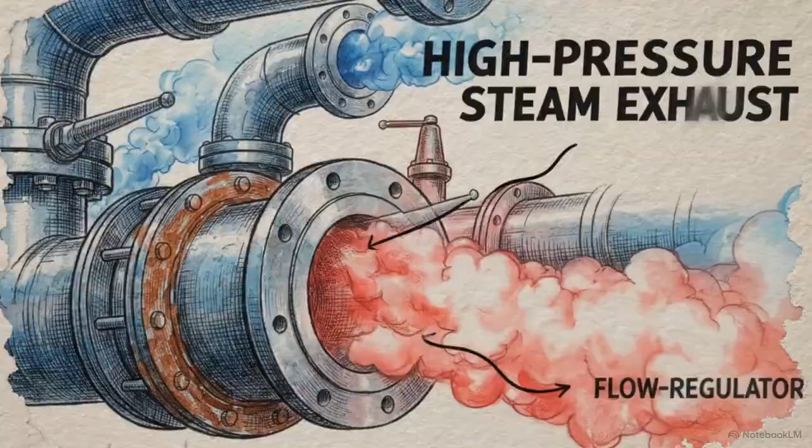In a modern energy facility, scale is absolute. Every turbine, compressor, and pipeline operates under immense pressure, leaving zero margin for error. A microscopic hairline crack or an inaudible vibration in a single pump can cascade through the system in minutes, bringing production to a halt and triggering millions of dollars in losses.

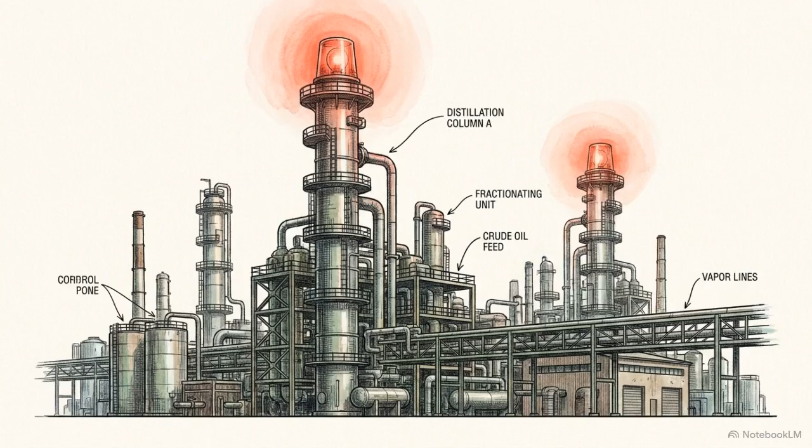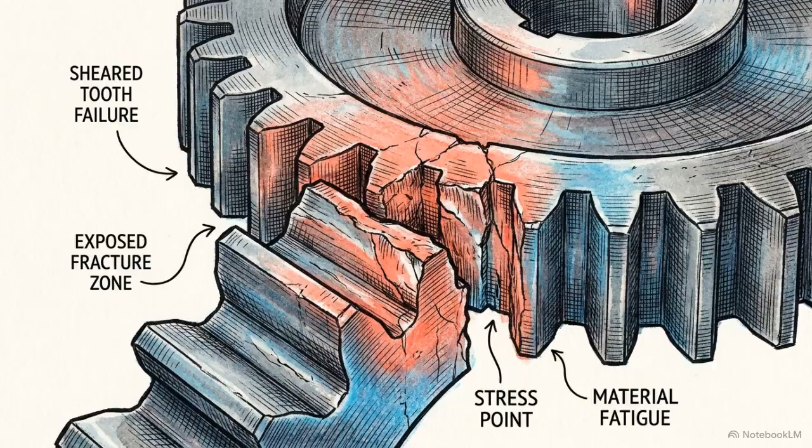For decades, industrial maintenance relied on fixed calendars. Technicians ran routine checks based on standardized schedules, regardless of how the machinery was actually performing. This rigid approach meant facilities often operated in the dark, waiting for a part to visibly fracture or fail before initiating repairs. To secure continuous production, the industry required a method to see those fractures forming in real time.

This logic drives the move toward predictive maintenance. OmniPetro functions as the intelligence network for these facilities. It continuously monitors live operational data to intercept mechanical stress before it manifests into physical damage. Because in the energy sector, reacting to an accident guarantees a loss. True operational safety requires anticipating the breakdown long before the alarm sounds.

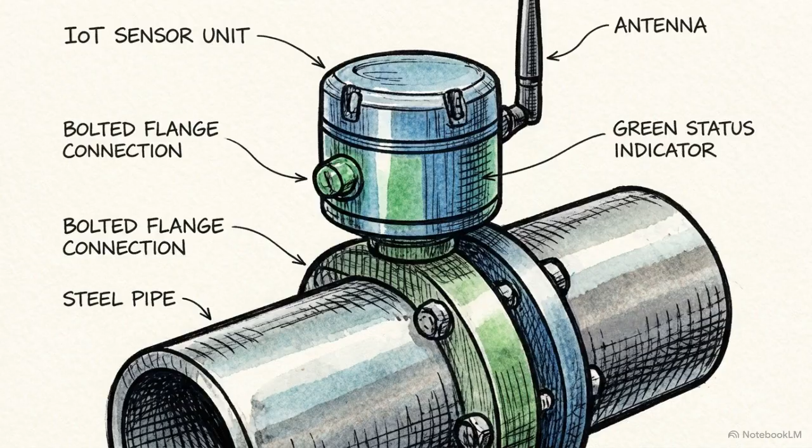To achieve that anticipation, OmniPetro deploys a dense physical layer of sensors. These units constantly measure the vital signs of massive assets, tracking temperature, pressure, and operational load. This data feeds into a system evaluating asset integrity, measuring not just whether a machine is turning, but its long-term structural resilience against compounding stress.

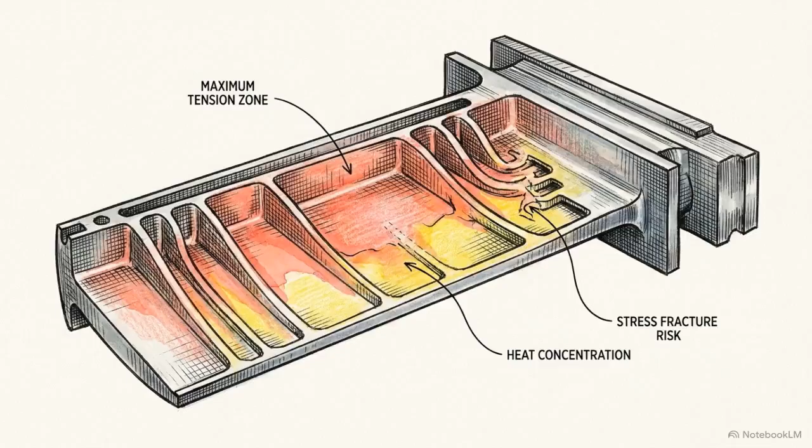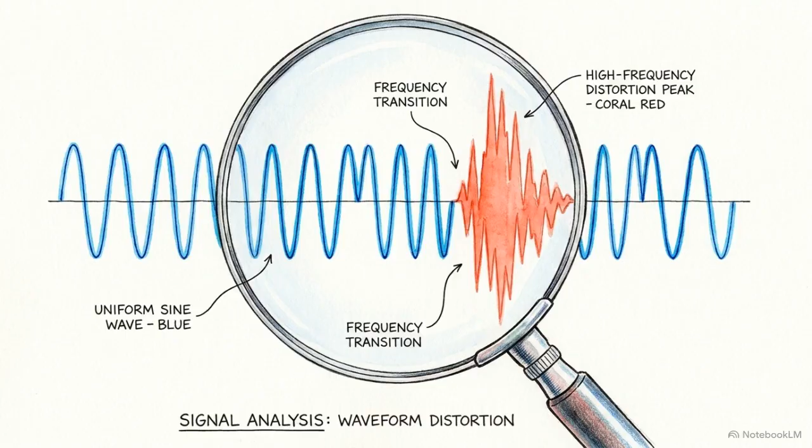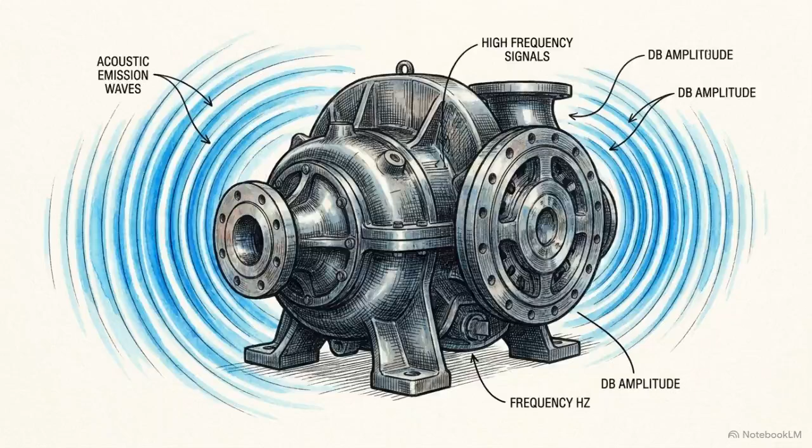This diagram visualizes the earliest warning sign of that stress: vibration. Through precise vibration analysis, the platform captures the exact rhythmic baseline of a machine and scans for the slightest irregularity. A microscopic shift in frequency, entirely undetectable by human hearing, is immediately isolated. The system interprets this tiny acoustic change as the physical precursor to a damaged bearing or imminent mechanical collapse. Industrial hardware broadcasts its eventual failure in these quiet, high-frequency signals. OmniPetro provides the exact analytical sensitivity needed to listen.

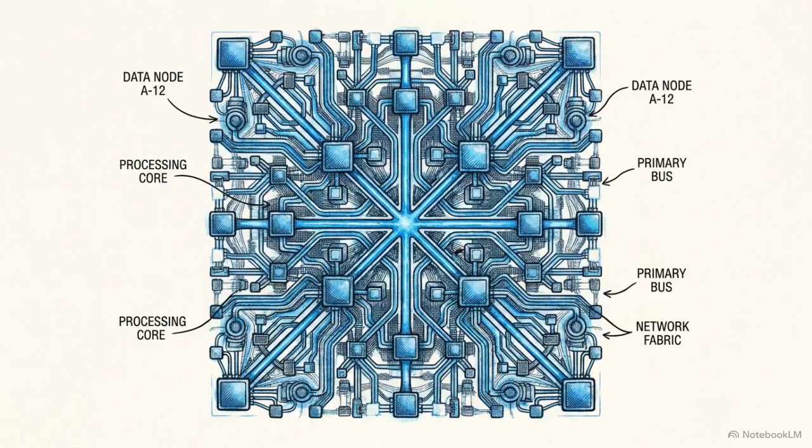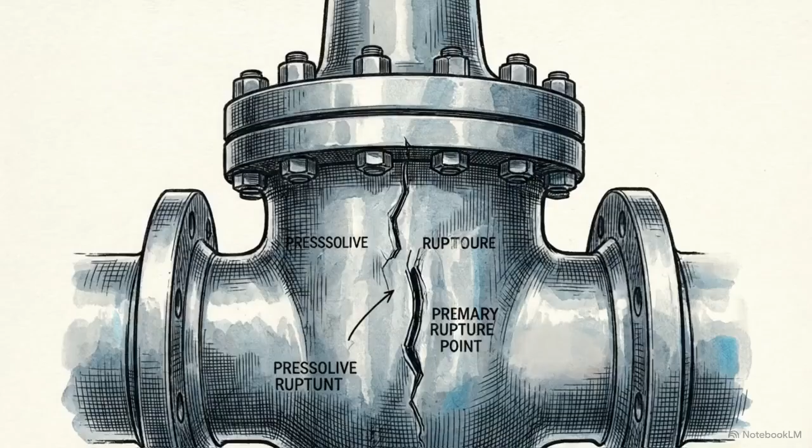Once that anomaly is flagged, the artificial intelligence takes over. It contextualizes the live reading by comparing it against decades of historical records and operational models. The algorithm calculates a highly specific failure prediction, mapping out the exact operational hour the machine will seize and the physical extent of the resulting damage.

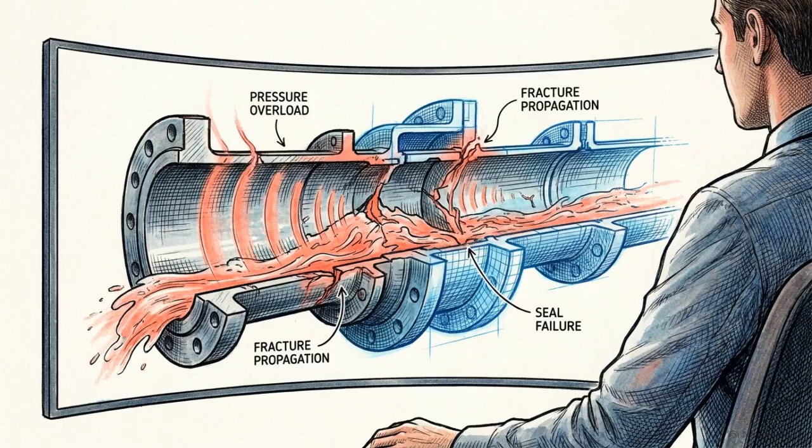This split-screen schematic demonstrates how OmniPetro verifies this safely by constructing a digital twin. This virtual replica mirrors the real-world equipment flawlessly, reflecting its live data stream and current load. Pushing this model forward in time artificially accelerates wear, simulating structural collapse. The facility can effectively experience the entire trajectory of a disaster and map out its consequences entirely within a safe virtual environment.

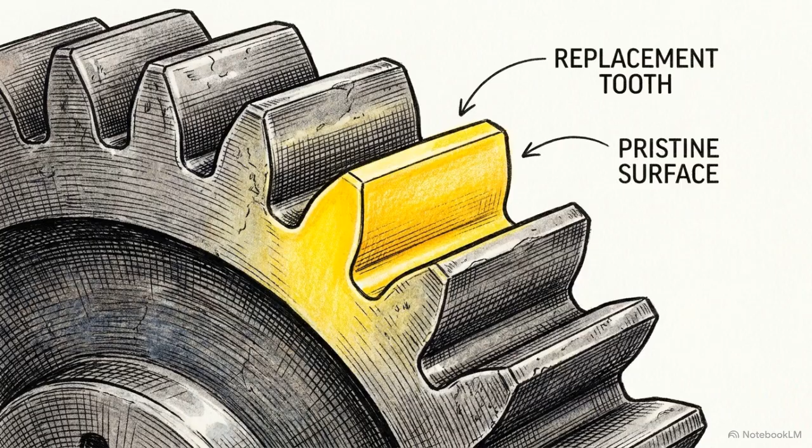Knowing when a machine breaks is just the first step. The system must locate exactly why the stress began. OmniPetro reverses the timeline, tracing the sequence backward to the initial microscopic origin. This diagnostic work addresses the underlying mechanical disease, not just the symptoms. By isolating and neutralizing the exact origin point, the threat is permanently removed, securing the long-term viability of the equipment.

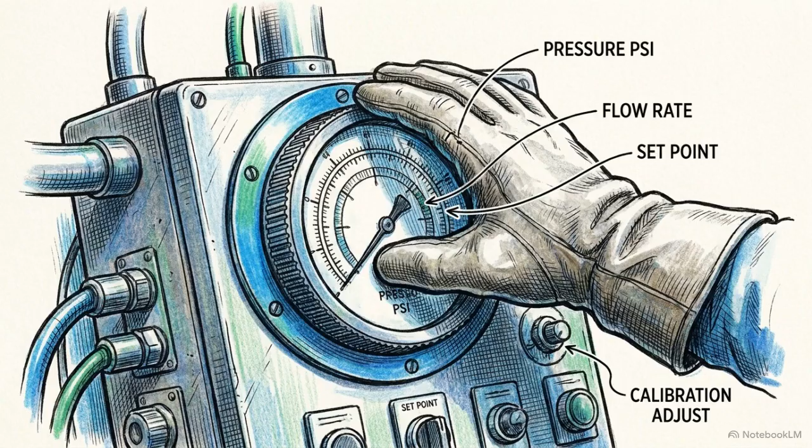This foresight changes the atmosphere on the facility floor. The panicked sirens and emergency shutdowns of a sudden breakdown are replaced by quiet, deliberate action. Long before the predicted failure date, the system automatically calculates the required logistics, ordering the exact replacement parts and scheduling the necessary downtime. The platform does not remove human expertise from the equation.

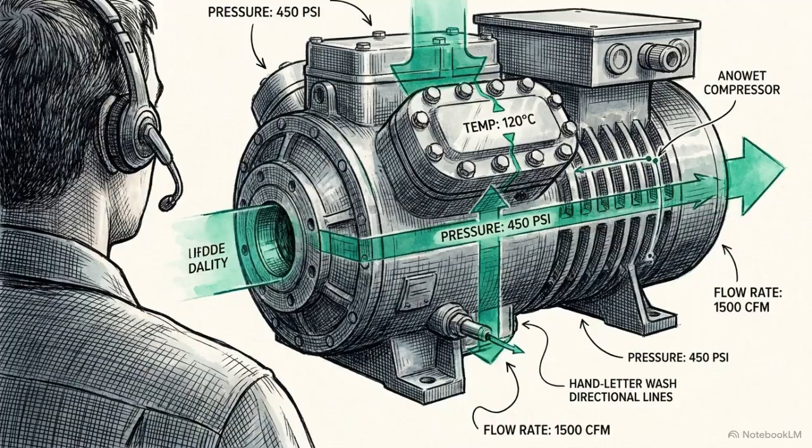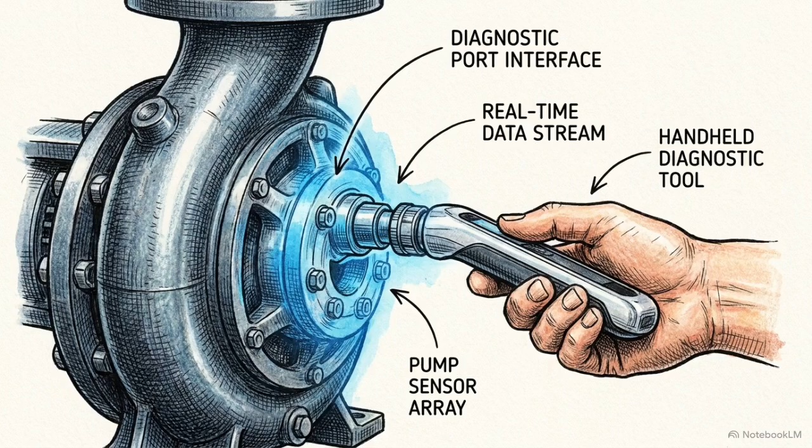Instead, it provides technicians with total operational foresight, giving them the exact data they need. An engineer reviews the system's analytical roadmap, evaluates the physical state of the machine, and executes a planned surgical repair under completely safe conditions. The true efficiency of OmniPetro is found here, seamlessly pairing predictive machine intelligence with the decisive physical execution of skilled engineers.

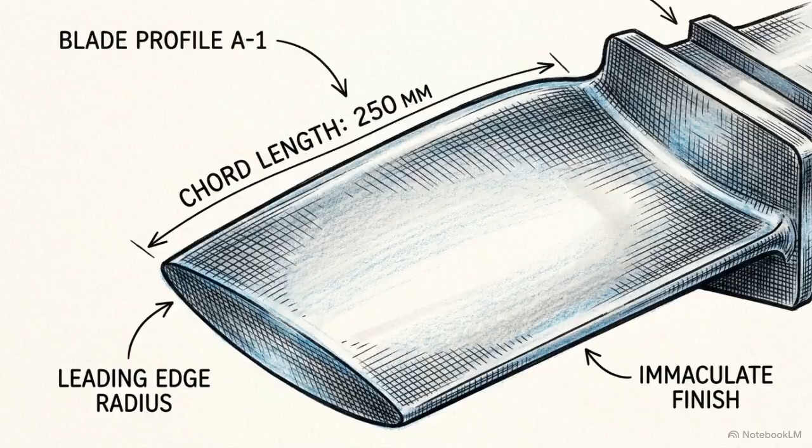When scaled across an entire facility, this model improves personnel safety, extends the operating life of equipment, and reduces environmental emissions. Industrial maintenance transitions from a reactive gamble into a controlled, highly predictable science.

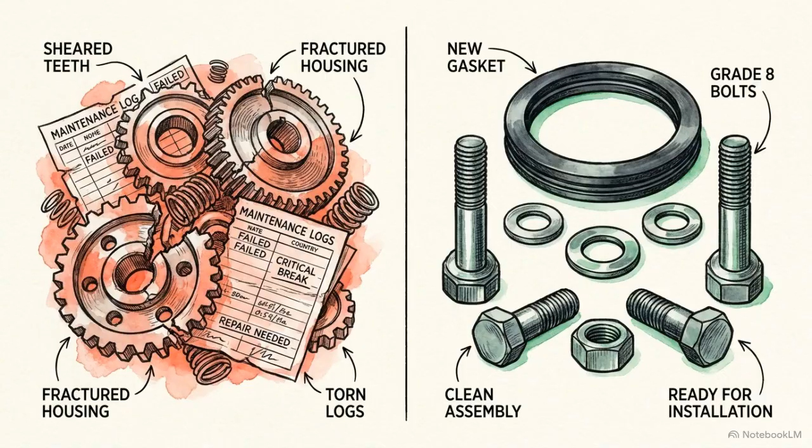But this physical stability is only part of the equation. We must consider how the health of a single valve scales up to impact corporate profitability and ultimately global energy markets. In our next episode, we will follow that data upward to explore energy management, profitability, and how local operations link directly to the global economy.